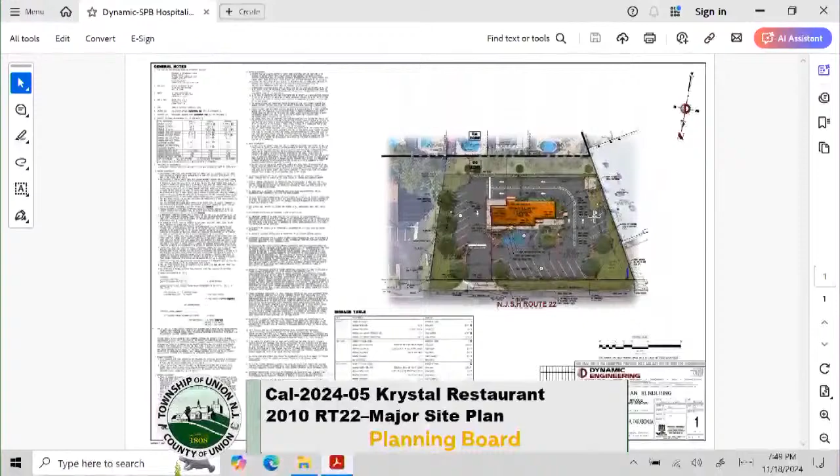What we were trying to do was pull it as far from Route 22 as we could to keep the dumpster out of visibility. But I think we can screen it and continue to pull it north along that western property line and have it circulate counterclockwise, the same as everyone else. We may end up losing a parking space or two, but the ordinance requirement is 11, and we have 25, so we have a little room within that buffer. If that's the board's preference, I think we can pull it around that side of things.

Just one follow-up for clarification. If you moved it, couldn't you put parking spaces where the dumpster currently is? There's the potential, for sure.

Thank you. Just to follow up again, there's 25 parking spaces, right? That is correct, yes. And I know this is probably more of a question for the architect, but if I counted correctly, in the floor plans there's seating for 20. Is there? Yeah, yes, so there are 20. So there are currently more parking spaces than there are actually seats inside the restaurant. That's correct.

Oh yeah, where are the employees going to park? Well, that's why we have the additional parking, not only for employees but for pickup and the like. Got it. Usually in these cases we're asking for parking variances, but we wanted to make sure from an operational standpoint there'd be enough for patrons, employees, and again this day and age for pickup, for call-aheads and the like.

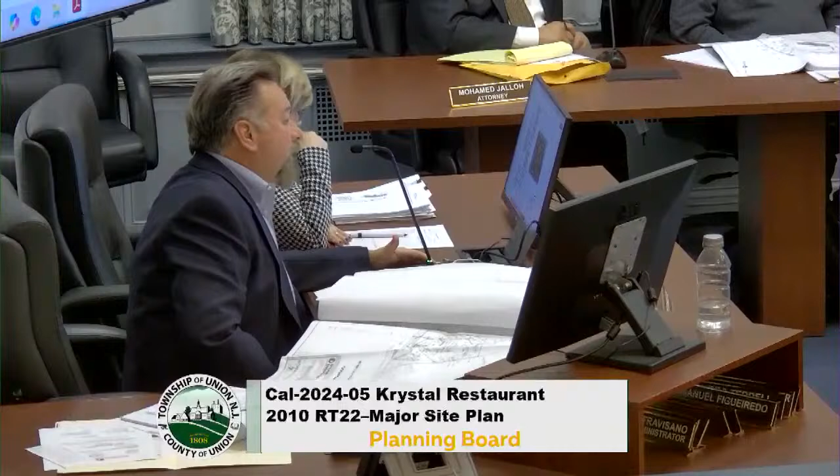Any other questions from the board? Mr. Vice Chair, yes, if I could. Mr. Taylor, one question I had regarding the garbage pickup. Did you indicate that would be on off-peak hours?

Yes, that's correct. My concern is that the way it's configured, in order to back up to get that dumpster, you're going to have audible backup beeping going on. Is there a way to avoid that being done in the middle of the night? Is that something that could be coordinated? I'm not sure what off-peak is considered, but if it's 3 o'clock in the morning, I'm sure the neighbors are going to hear that beeping and that backup.

So if we rotate it and pull it along that western property line, where the truck then circulates in a counterclockwise position, I think we can absolutely work with that. It's going to be a private hauler, so we'll have a little bit of control. We could probably schedule it so it doesn't coincide with breakfast, lunch, or dinner, and have more of an off-peak in the mid-morning, as opposed to overnight where we were trying to avoid the customers in the drive-through. So I think that's absolutely something we can work with.

If the board has time frames they would prefer it not to be, potentially in the overnight, I think that's something we can work with, and we can work with your office on relocating it. I don't think it triggers any type of variance, so if it works out better to move it up and buffer it nicely, it moves it away from the residential area too, so I think it's a win-win.

And one other thing, it doesn't fall directly under you, but as far as entering the site, the headlights coming in, do you feel comfortable with the different fencing and landscaping out there, that as cars are circulating around the site during late night hours you're not going to get lights in the back of those houses? I do. I will defer to the site engineer who has extensively put that together, but yes, I do think what we're proposing will shield the headlights from the neighbors in the rear. Okay, thank you.

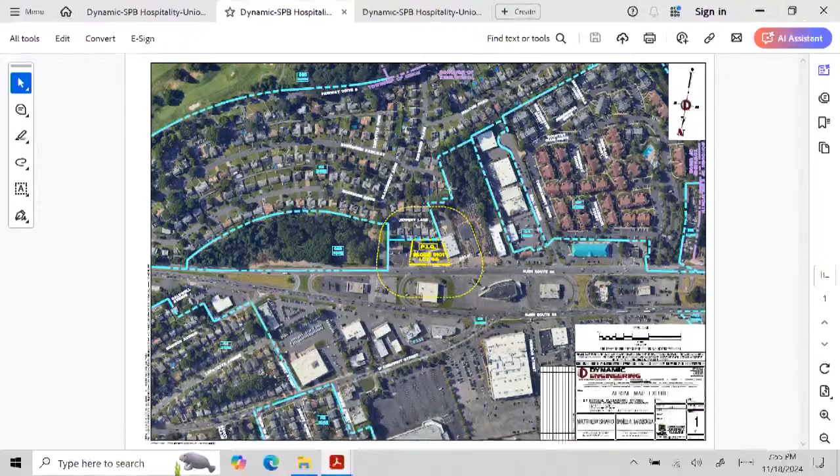Sure, I'm going to reference Exhibit A2, the aerial map exhibit prepared by Dynamic Engineering. This is a blown-out version of the area, just to give you an area of the location. It's located at 2010 Route 22 East, Block 3101, Lot 33, and the surrounding uses - again, per Mr. Taylor, north is at the bottom of the page.

It was me. So north is at the bottom of the page, just for reference. Route 22 eastbound is along the center of the page. The middle of the screen here is the site. To the north is Route 22 with some commercial across it. To the west is a commercial use, and then the park next to that. To the south is residential uses, and to the east is more commercial uses along Route 22.

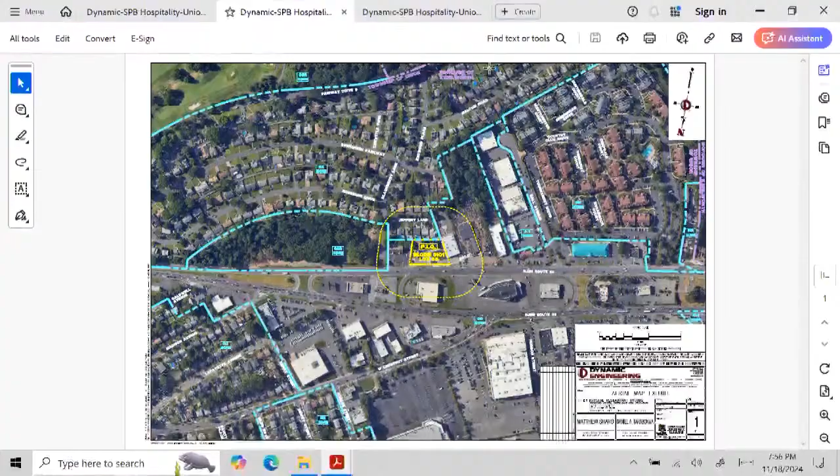I have a second exhibit, I'll call it A3. It blows it up a little to give you a better idea of what's actually on the property today, and the surrounding uses directly adjacent to the property. Again, north is to the bottom of the page, Route 22 is along the center, and our site is in yellow. As Mr. Taylor mentioned, the current existing conditions has three driveways - one along the western edge, one directly adjacent to it.

I did not do that. Directly adjacent to it, and then one at the far east side. As you can see, this was the existing Speedway, pretty much paved all along the front from side property line to side property line, right up against the front property line along Route 22. You have your existing convenience store located at the east end of the site. The canopy was located more in the center of the site.

There are still some islands there if you go to the site today. As you can see, they have some new pavement here in black - that was from the removal of the existing tanks. So there are no existing tanks on site anymore, they've all been removed. And to answer the question on the monitoring wells - they are in place right now strictly for monitoring.

There is no active remediation going on. It was decided that there would not be any remediation needed. There are about 13 wells on site, 3 of them are impacted by the proposed location of the building, so they will be relocated. There is an LSRP on hand from the previous owner, and all the records are with the DEP. So it is an active monitoring site, not a remediation site.

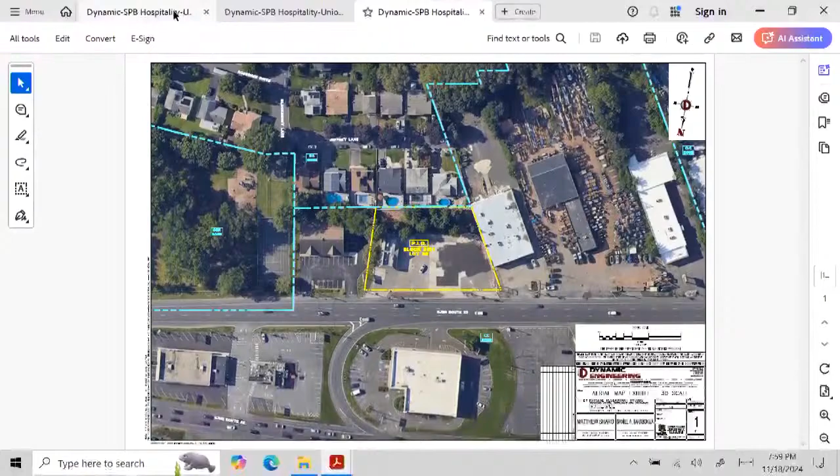What we are proposing here today - I believe this was submitted as part of the package, but let's mark it as A4 anyway. This is a site plan rendering.

This is essentially sheet 4 of the site plan package that was submitted as part of this application. It's a colorized version - we took the site plan sheet and the landscape sheet and combined them, adding some color to make them pretty for this presentation tonight. I'm going to zoom in a little bit so people can see it better.

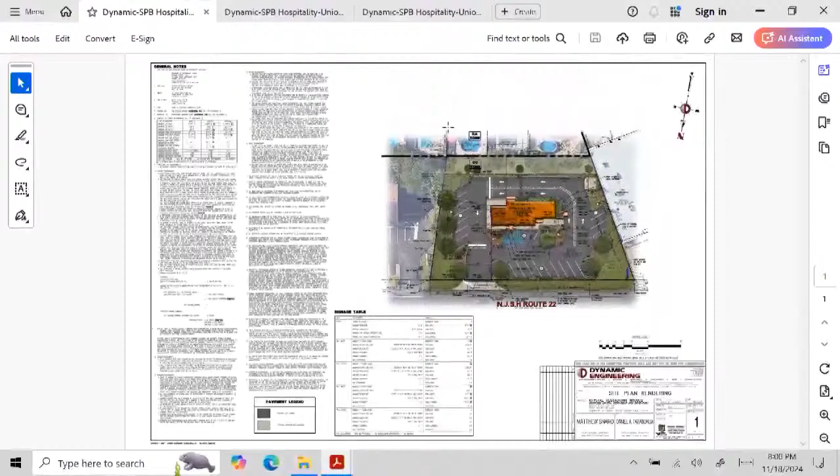Let me see if I can dial that in a little bit better. Is that better for everybody there?

For purposes of this presentation, north is to the bottom of the page. As you can see, Route 22 eastbound is at the bottom of the screen. So I'm going to run through quickly what we're proposing here tonight: it is a 2,057 square foot building with a drive-through and 25 parking spaces.

I know we've talked about some of this, so I apologize - some of it will be repeated. I'm just going to walk around the site real quick. As you enter through the driveway that Mr. Taylor explained, you make that right-hand turn to do a counterclockwise motion through the site. You have parking stalls along Route 22, and then some parking stalls along the front of the building.

There is a waiver, I believe, for a 5-foot sidewalk, whereas 10 foot is required from the building. We are proposing 5 foot. It's only 3 stalls out of the 25 stalls that require this waiver.

As you pass the parking stalls, you enter the drive-through. There's a little gray area here - that's basically the pre-board, the pre-menu board, advertising what's available. Then as you move forward through the drive-through, you see this orange box - that's the ordering station with the ordering menu board. Then you drive around through, and your pickup window is down on the eastern side of the building.

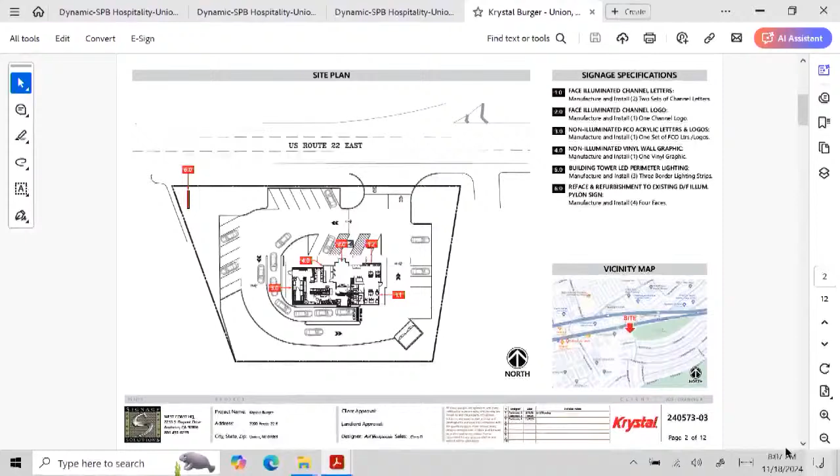This is just a quick site plan of the building. We'll go through each location. This is the front of the building, facing east, this small narrow space—let me go back to the render so everybody knows. So that would be this building, which is what you're looking at in the architectural render.

All right, so this is one of the doors—this is the front side facing Route 22, and this is the rear side with the drive-through. As you can see, there's a sign above this door stating the brand. This sign is 23.09 square feet, so it meets your ordinance requirement of one sign under 50 square feet.

Just important to note, the original application did have two signs on this facade. We went back to Krystal and removed one of them. Due to the way the building's facing, we didn't feel the extra sign was needed, so we went with just the one sign above the door—again, no variances associated with that. And in the top corner, there's a nice render of the building itself.

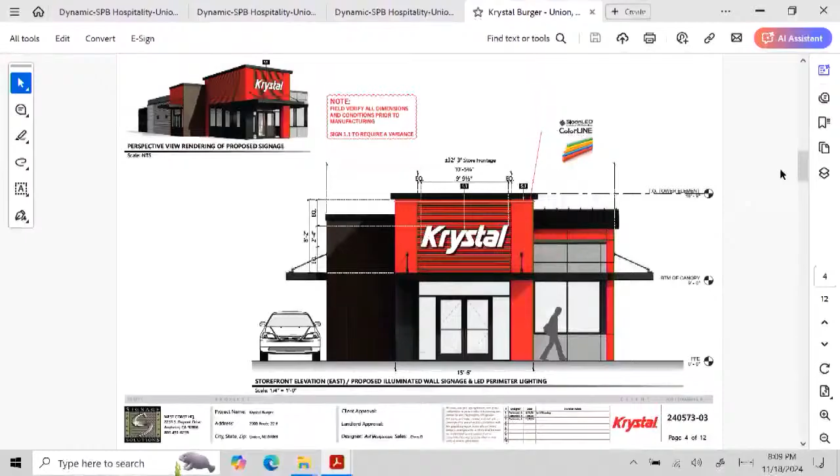All right, next. So this is the side that you'd be looking at from Route 22. Call it the side, I mean, it's front-facing towards 22.

As you can see, the same Krystal burger logo here, that's 23.09 square feet. And there's the little burger logo above the door, showing where the door is, that's 9.5 square feet. There are two signs here, so technically there is a variance, but they equal less than the 50 square feet required on the facade. So there is a variance required for the two signs.

And one is actually almost the picture of the burger. We consider it a sign because it's the logo showing the entrance of the store.

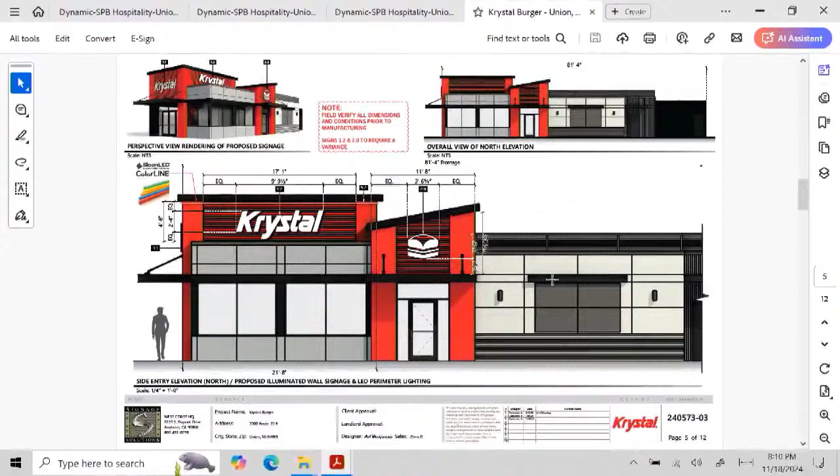So there's a couple nice perspective views of the building as well. You can see up front here they have a nice awning that goes around and covers the two doors. You have nice glass windows for the dining area, and then some faux windows and nice architectural treatments along the back of the store where the kitchen, freezer, bathrooms, all the fun stuff is, at the back of the building.

Wrong way. So here's the other small end of the building, facing west. Again, you have the Krystal name here, a burger on either side of it, and then this, it's kind of hidden, a little hidden graphic. We considered it a sign just for conservative purposes, but it's really more of an architectural feature, matching the red of the building and culminating that burger. But if you look close, that is half of the burger logo there on the side of the wall.

They had to explain that to me. I didn't know what it was. It had to be pointed out to me too. I just thought it was painting on the wall. I didn't realize it was actually half of the burger. So we did consider it a sign just for conservative purposes.

So there's a couple additional variances required for the signage on this side of the building. This sign is actually 87 square feet, the half burger, and then the Krystal with the two burgers on either side is approximately 43 square feet. So we'll have the variance for the two signs on that side, and it's obviously above the 50 square foot limit. But if you take away the half burger, it's under 50 square feet. So if you consider that half burger signage, then we're requesting a variance.

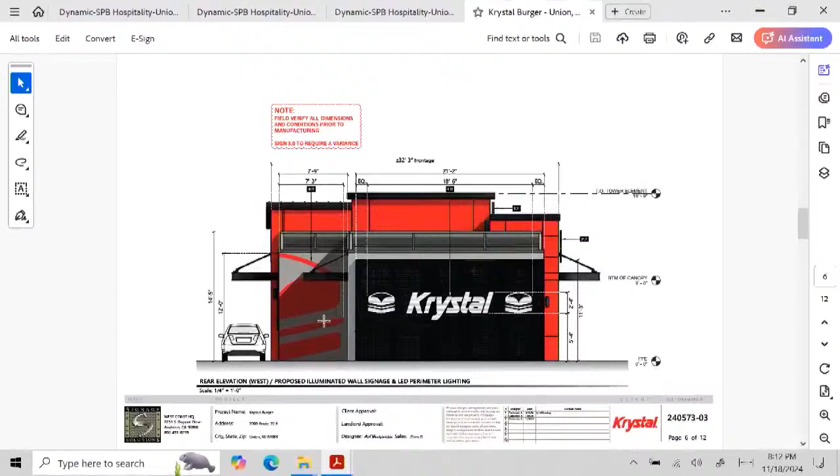There's a couple other variances incorporated with this. The height of the Krystal burger and the height of the burger logo does not meet the requirement, and the length of the Krystal burger sign does not meet the requirement either. And again, in the preparation, there originally was supposed to be a sign on the rear of the building, but that's been eliminated, so there'd be no signage visible from the residences.

So this is the side looking at the drive-through window, the other long side of the building. As Mr. Hale stated, we did originally have a Krystal Burger sign up in this red panel here, but obviously it's facing the drive-through and residential area, so there was no need for it.

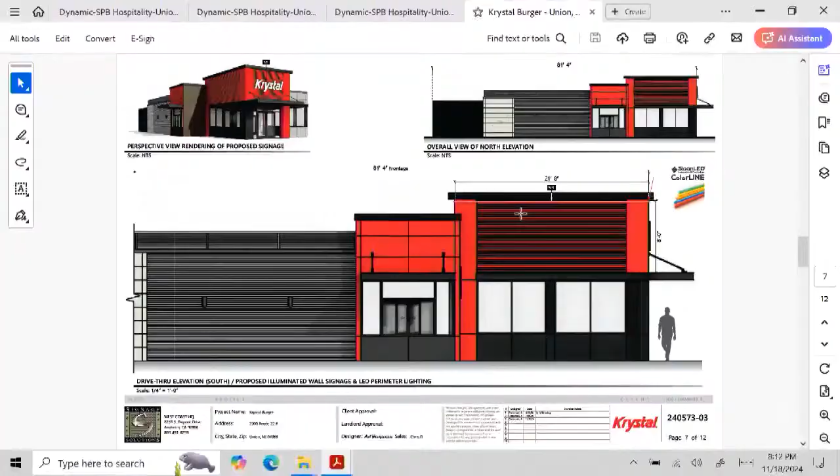I went through the architectural details, just so everybody knows, the building at the tallest point is about 19 feet high, so it's not a very tall building. Most of it's even less than that, it's only this small portion up at the front in the dining area that's about 18 feet 9 inches to be exact.

But they do a nice job with the architecture and with the awnings and different architectural elements throughout the building.

And from an engineering standpoint, you'll work with Vince and the crew at Colliers to address any comments, and also with the fire department and health department? Correct, we had no issues with any of the comments. Okay, I have no further questions at this time, Mr. Sharrow.

Just for the record, the area adjacent to the residence will not be illuminated, correct? That's a great question. So that's illuminated by lighting, but there's no signage back there, and a couple of these signs are not illuminated as well, on the rear of the building. The short side where you enter the drive-through, these are not illuminated. We discussed that because although they're probably not visible from the residences, we didn't want that side lit up, even though they've got a lot of the commercial uses. Just for visual purposes, that's this side of the building.

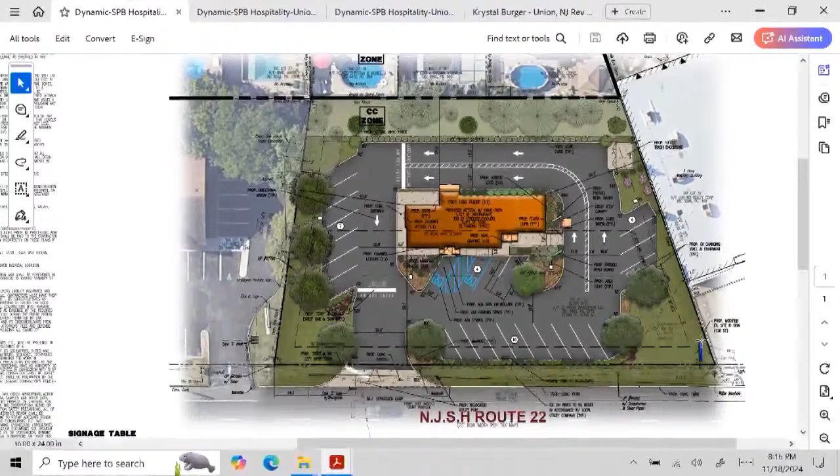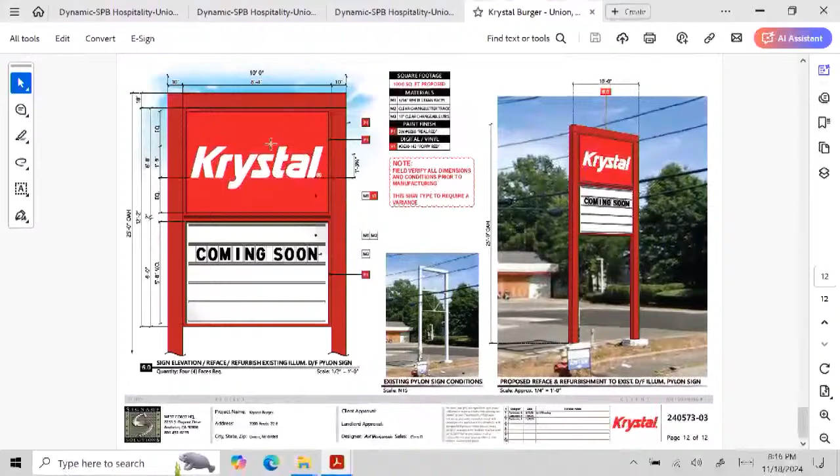So, in the analysis memo from Colliers dated September 27th, there were several references to the signage. Are you indicating through your testimony that you've changed the application so that some of those conditions are no longer present? Actually, that's a great point, there is one sign that I missed, it's the ID sign. So that does require a couple variances, so that's maybe why you're asking the question. Up in the front corner here is the existing location of the ID sign, the blue line here. What we're doing is using the existing sign that's still there today and just refacing it, so it'll be 100 square foot, with 2 poles with the Krystal and the signage. That's what it is today, so we are basically reusing the same sign template as there is today, and the same sign location, which is another variance. But you're 100% right, we did eliminate the sign on the back of the building, eliminated a second sign on the west side, so yes, we did eliminate variances and reduce the signage.

And again, if you consider the half a burger a sign, it's a variance too. Looks like paint to me. It looks like paint to me too, I had to be told 3 times during the prep meeting, I said, where is this sign you're talking about?

Considering the size of the lot, is there a plan for snow removal? It's typical snow removal, they can use a parking spot if needed, probably one of the ones up here towards the front. But there's plenty of space here in the back corner that we can pile some snow up, and some space where this trash enclosure used to be. So if it gets to the point where we need a parking space, I don't know that there's going to be anybody on the roads anyway.

So to revisit the issue of the dumpster, you're proposing to move it, can you show us where it would be moved? Sure, looking at it, I would probably lose one or two of these spaces here. Why wouldn't you move it to the front corner of the lot and just shield it with shrubbery, or in that open space right here, behind the sign, behind the trees? Move one of the trees and just tuck it in the corner of the lot.

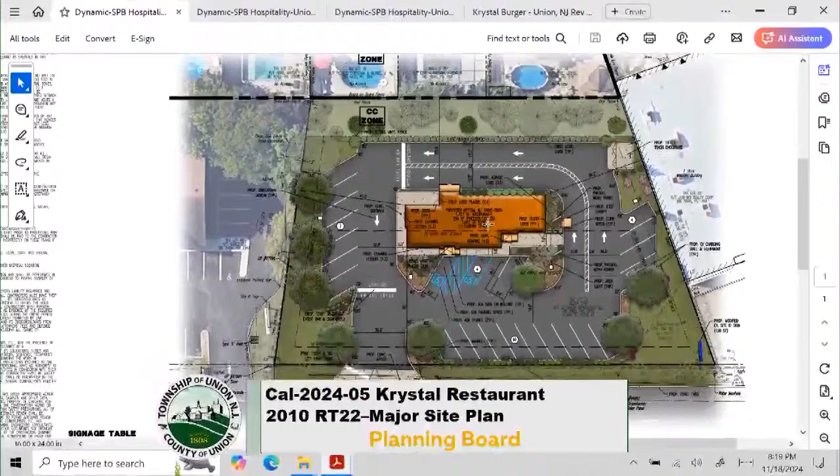One question regarding the environmental situation: does your LSRP feel confident you'll be able to move those monitoring wells? Yes, the discussion's already been had. For everybody's reference, there's a pocket of them right around this part of the building, so they can be moved. The environmental issue is hydrocarbon related - it's a groundwater thing. So there'll be continued monitoring, just not those 3 wells? Correct, there are 13 wells on site that will be continually monitored.

As far as reducing the width of that sidewalk from 10 feet to 5 feet, that's not affecting any of the handicap access there? No, it's 5 feet, so there's no issues there. All right, thank you.

Any other questions from the board? Questions from the public? It's thinned out here. Mr. Vice Chair, I have no further witnesses at this time, but certainly any that have testified are here to answer any questions that the board or the board professionals may have.

Any other questions from the board? Just more of a statement than a question - at which point will corporate decide the hours of operation? Jim and I are in discussions on that. But we'll certainly keep the township advised. Thank you. Thank you very much.

Thank you, Mr. Hale, would you like to summarize? Yeah, just briefly, and thank you all for your time this evening. I know we had a crowd, most of them have left, but this is exciting that Krystal has chosen Union Township to make its first statement in the state of New Jersey, and they've really done well. If you look at this site plan with the landscaping - one resident had asked a question about the driveways, reducing it from 3 to 1 and moving it further east is certainly a great idea for site circulation. Again, enhancing the 25-foot landscape buffer in the back, adding the privacy fence, and landscaping throughout the site.